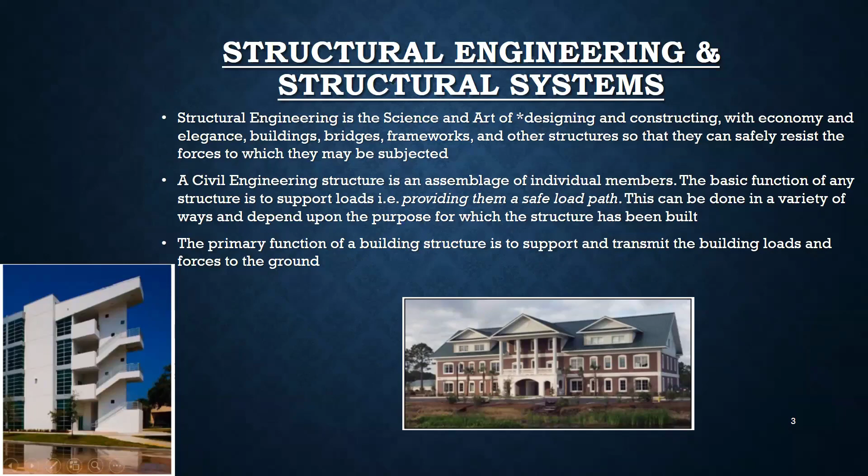The load patterns, as you know, are such that gravitational loads are transferred from the roofs to the beams, from the beams to the columns, and from columns to the foundation.

But in reality, we could not have a simple structure. We could have unsymmetrical buildings also, like this one, or this one. So what we have to do is accurately design for these shapes.

Normally there is a debate. Some engineers say that softwares are not that reliable and you have to do it the manual way, but it's not that way. In manual designing, you only design for gravity load. We take the help of software because it optimizes your work, and if you don't use it, if you are designing a 50 plus storey building, you will take months to design it. By the aid of software, it only takes a few days.

But purely relying on the software is not enough. You need basic concepts and basic checks to know whether your design is safe or not, because software is just like a machine. Whatever input you give, it will give you the output, but if you haven't given the proper input, the output will not be proper. So you have to have checks to verify the values are not drastic. For example, if you design a beam of 40 inch, that can be designed by software, but is it practically acceptable? That needs to be checked.

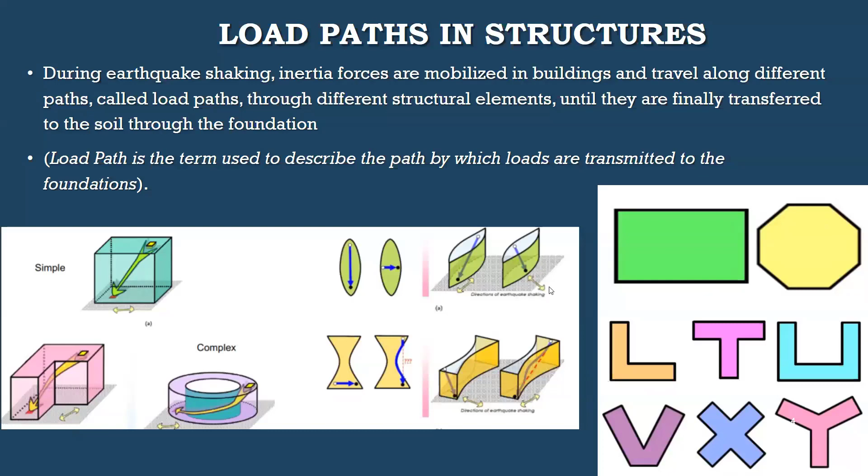In addition to that, you could be having different types of irregular shapes. For example, you could have a complex shape like an L shape, T shape, U shape, V shape, X shape, Y shape. So what is the main difference in designing these? The torsion and twisting effect comes into play, so the design gets a little more conservative and you have to do proper checks.

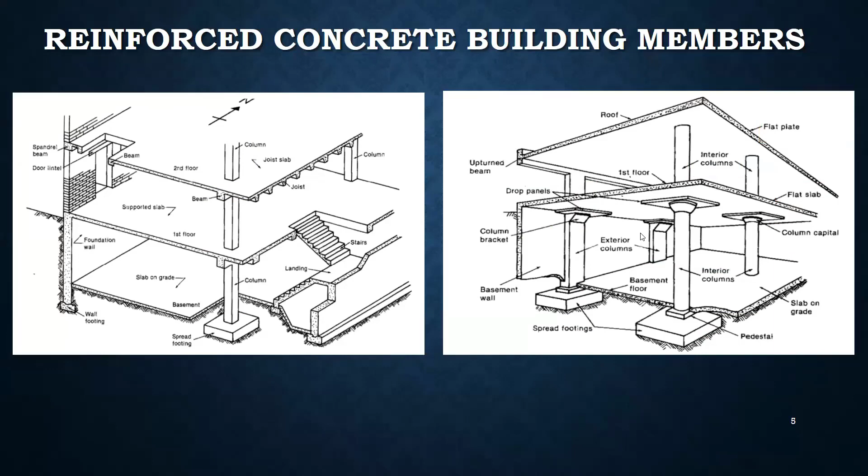There is always a conflict between an architect and a structural engineer. An architect mostly looks for aesthetics and doesn't have much knowledge about structural stability, whereas an engineer is always concerned about structural stability and performance. So they both have to work as a team in order to make it structurally sustainable as well as aesthetically good. But safety is the main concern - you should not compromise the strength with respect to beautification. So that debate needs to be resolved.

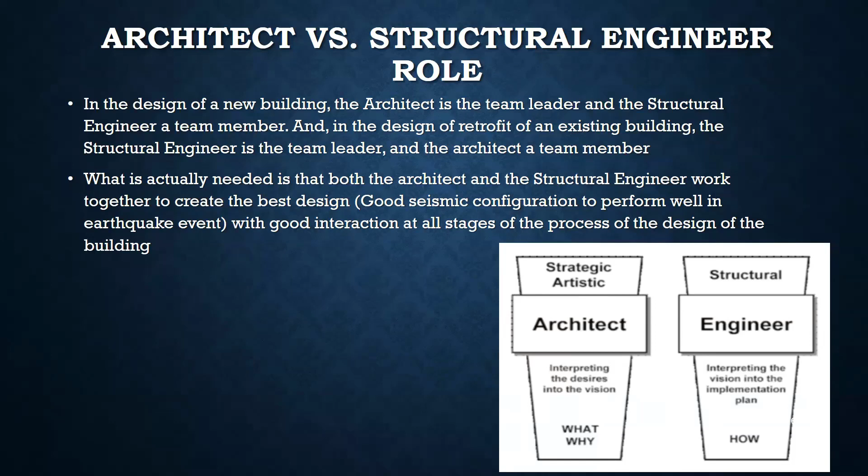For a bridge structure, an engineer is also always the architect, because in bridges we do not have architects. So bridge aesthetics is always dependent on an engineer. The structural systems we could have are gravity load systems and the lateral load resisting systems.

In gravity systems, we can have this slab supported on load bearing walls, slab supported on columns, slab supported on beams, and the beams supported on another beams. What happens is that if the spans are long enough - these are spans - for example, these are two beams resting, so we have to provide an internal beam in order to control the deflection and also the depth of the beam. So this beam is thus resting on another beam, not on column. So in that case, we give...

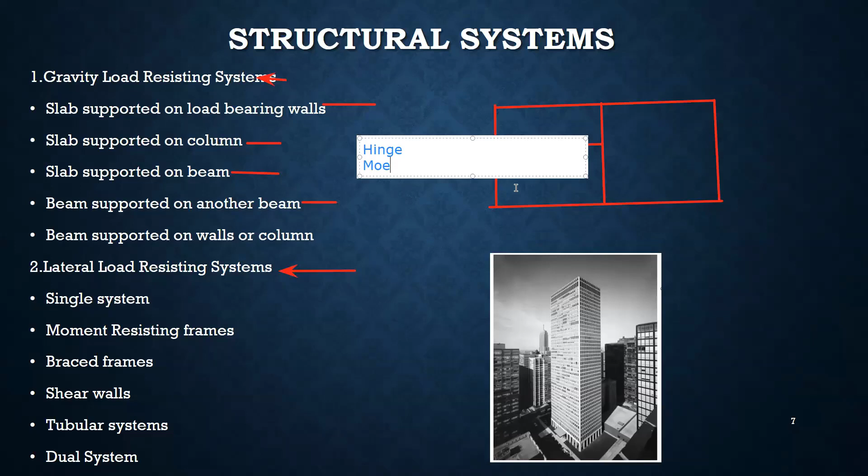...what we call as the hinge, or we can say the moment releases. Since the beams are resting as simply supported, the joints are not rigid there, and that is properly modeled in software like ETABS and SAFE. When we have secondary beams, the options are there, and then we manually give the input as secondary beams and primary beams.

And lateral load resistance system, which we can have: single system, the moment resisting frames, the braced frames, the shear walls, and tubular systems, and a dual system. As we move down, the height increases. So as we go higher, then we go with advanced shapes, and performance-based designs come into play.

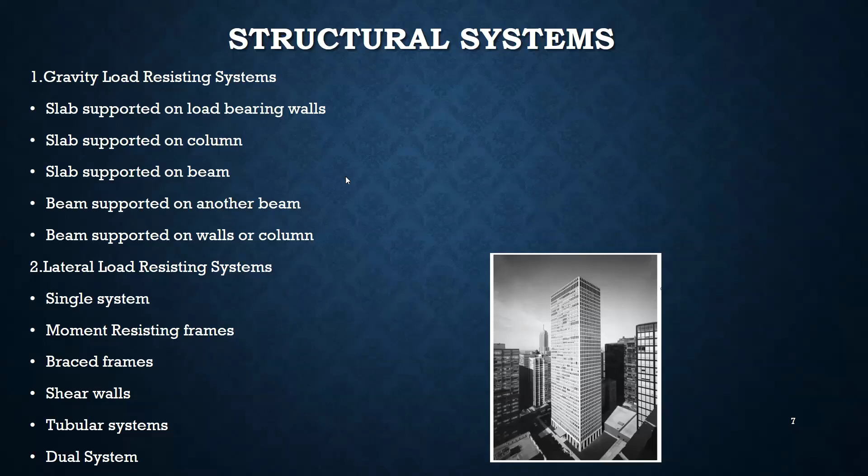So what is a wall bearing system? These are typical G+2 type of buildings maximum, where the slab is supported directly on the columns, and the columns may be of bricks. There is no proper design - these are all basically thumb rules and old standards. But keep in mind that these are not seismically strong enough, and for high seismic zones they are not recommended. So we have to avoid this, even if you are providing a G+1 building.

So in high seismic zones, you have to avoid this, because they have no lateral resistance and are only supporting gravity load. So in that case, if lateral load acts on it, the building is likely to collapse, and you can have loss of life.

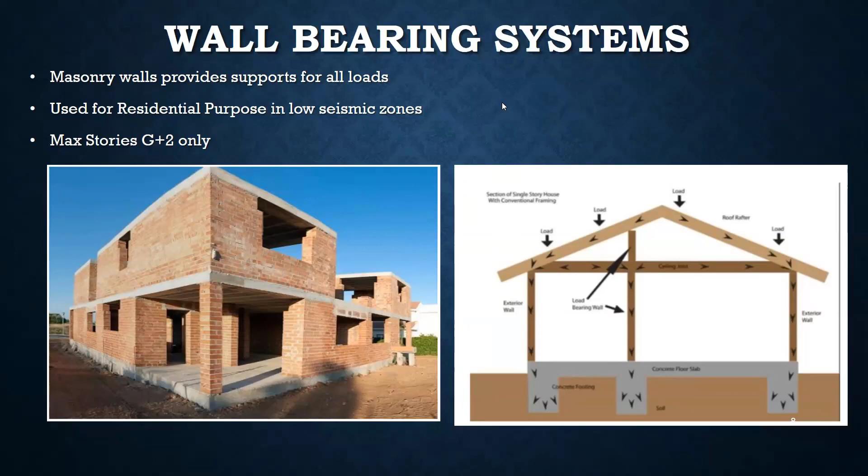A frame may be composed of a strong column and weak beam system, or a weak column and a strong beam system. But naturally we go for strong columns, because the columns are the main supporting elements, and you have to give the column more strength than the beams. If beams are stronger, then all the torsion will be taken by the beams, and the column will not take torsion. In case of lateral load, it is vulnerable to not behave properly.

And they are mostly used for medium rise buildings. For example, you can go up to maximum G+10.

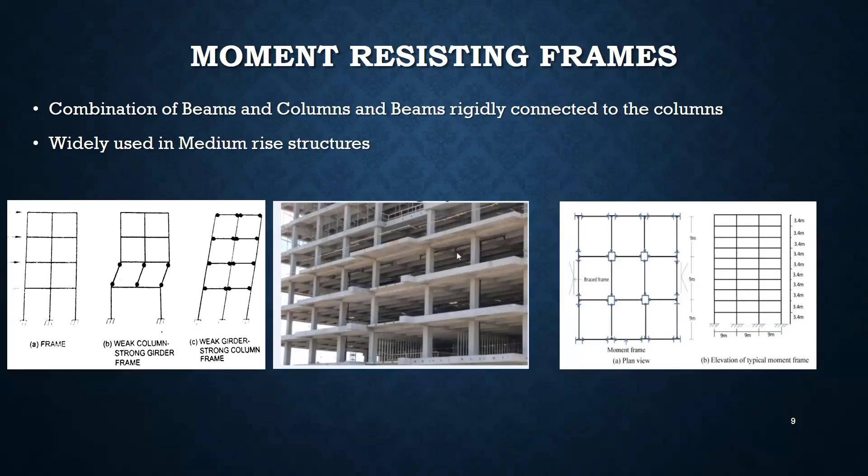Okay, shear wall. When the height increases, or we have non-symmetrical shape, like we have this type of arrangement, or you can say this type and this type of arrangement, in that case the twisting effect comes into play.

We perform the modal analysis in this type of structures, and in modal analysis, from the results we get different modes, and we have to control the translation as well as rotation. So if that is not controlled - as per the code there are some values - some codes say 90%, and these are basically ux, uy, uz, and rx, ry, rz.

So the software performs this analysis and gives the result. You have to check whether this is satisfying the code or not. If it is not satisfying, then you go for the walls. Basically the purpose of the wall is to give stiffness to your building. As you go higher, the stiffness reduces, so in that case you have to stiffen the building, and this is the best option we have.

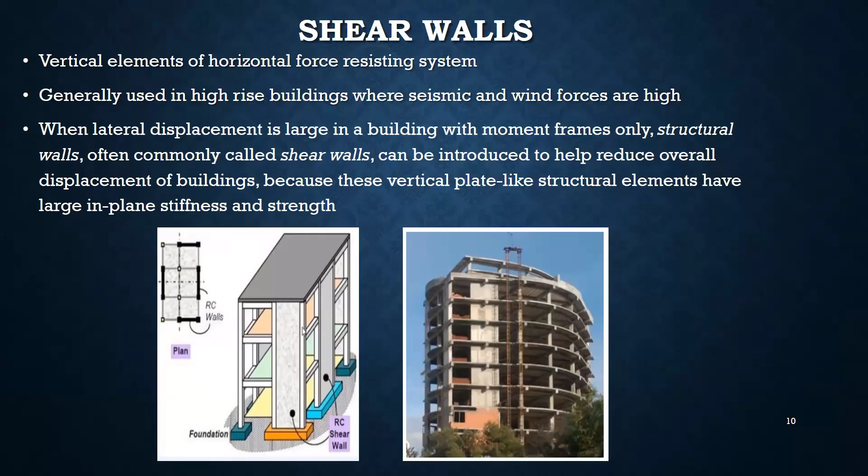And you can use it in moment resisting frames also. As we go higher, then the demand of RCC walls increases, right?

Okay, brace frames. As we go higher from a particular story height, then moment resisting frames are not safe enough to be used in the design, so in that case we use the brace frames. The frames could be diagonal frames, X frames, V frame, chevron bracing, K bracing, and global bracing.

What is interesting in this is that it also gives you good aesthetic view, if you can see from the outside in this image. So not only is it performing structurally safe, but also it is looking very good aesthetically. So it is serving the purpose for both the designer and architect.

Normally you can see nowadays that some buildings have very awkward designs - you can see the cross bracings and the non-vertical members. This is all possible because of performance-based design. And when you have the design adequate, you can provide any shape then, right?

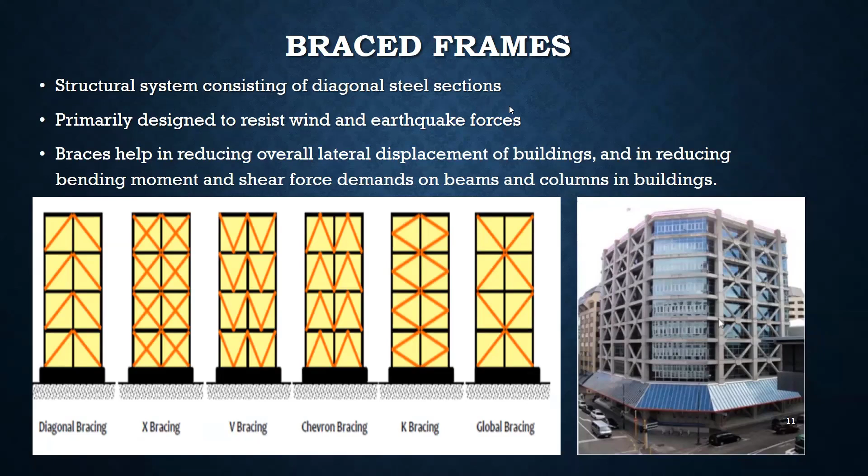So the types of buildings based on stories: up to G+10 you can call mid-rise buildings, up to G+20 they can be called high-rise buildings, and tall buildings G+100 and so on, there is no limit. Nowadays, you must have heard that in Jeddah they are building a building which will have a height of 1 kilometer. So even that is possible.

There are some interesting facts about mid-rise buildings, short buildings, and tall buildings. I will explain this in a bit of detail. For example, these are 3 buildings: this is a short building, these are medium buildings, and this is a high-rise building.

If you give an earthquake input at low frequency, the high-rise building will oscillate at low frequency, the medium-rise building will oscillate at medium frequency, and the short building will oscillate at high frequency. What we have seen recently at the very strong earthquake in Turkey is that most of the buildings were medium-rise, mid-rise buildings, and they collapsed because the P-delta effect was not considered in the design.

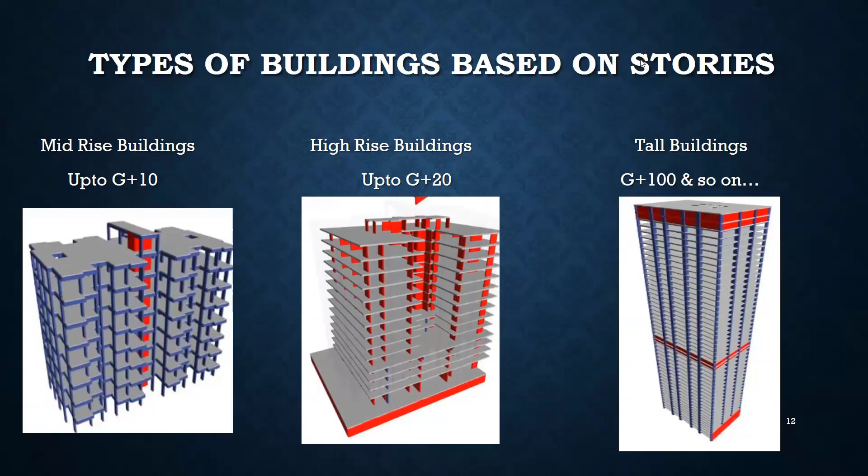So, high rise structures configuration.

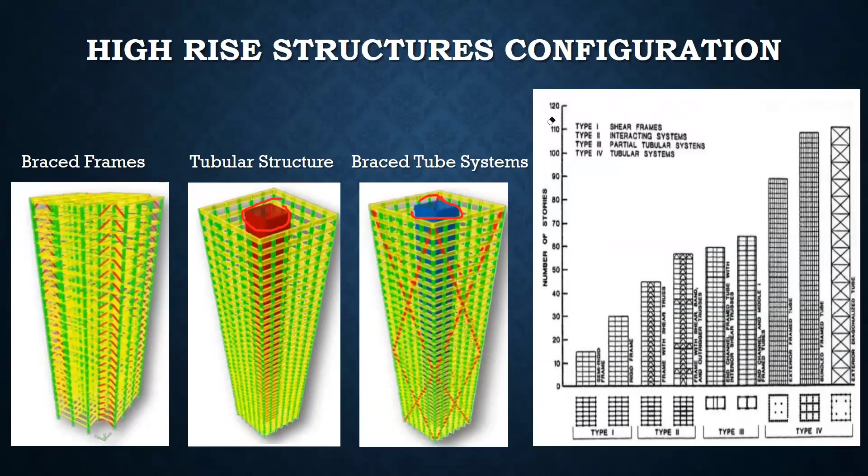We can see the center core arrangement, and these are all shear wall type arrangements, and the purpose is to give stiffness and uniformity. It is provided in the center to give more stability in the building. So as we go high, we can have any type of arrangement, but tubular structures and diagrid arrangements are normally used in high-rise buildings.

So regarding the deformation capability of buildings: if you have a moment frame only, as we go high, the sway effect keeps increasing. So we provide the structural wall, but with structural wall also, as we go high, the drifts are exceeding limits. So when we go with the global brace, the drifts are reducing. That is the recommended solution for high-rise buildings. The more you go high, you have to use bracings also.

In buildings, as we increase the number of stories, the second order P-delta effects come into play. For a 5-story building, there is no appreciable drift. In 10 stories, the drift is coming into play. At 15 stories, the drift is increasing, at 20 it is increasing more, and at 25 it reaches an unacceptable limit, which causes damage to the building and non-performance in case of an earthquake.

So based on the number of stories, we can classify: up to 60 stories you can go with the concrete frame tube, up to 80 stories steel frame tube, and tube in tube. For example, this is the internal core arrangement, and for higher than 100 stories, concrete brace tube. As we go higher, the number of floors increases, so we go with space truss and super frame arrangements.

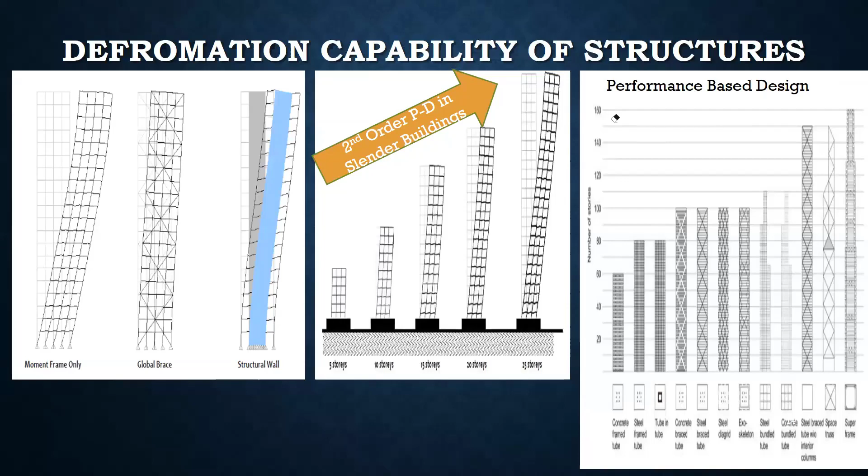So what are the different methods of structural design? You can have the working stress method, the ultimate strength method, and performance method. Working stress method is now non-popular because it is not as per the latest design codes.

The ultimate strength method, the LRFD method, is used for a particular height. Moment resisting frames are using it. The performance-based design is the most used for high-rise buildings. The higher stories are all designed based on the performance base.

So what we have to do is the serviceability design. You have to have the allowable material and control on the deformation limits for design load. In strength design, the material failure criteria comes into play. The section capacity is designed for the factor loads.

In performance design, you have to have a ductile structure and not a brittle structure, and the deformation capability is increased, and the loads, extraordinary loads, are considered. So it is basically the performance, and based on the performance, you design your structure.

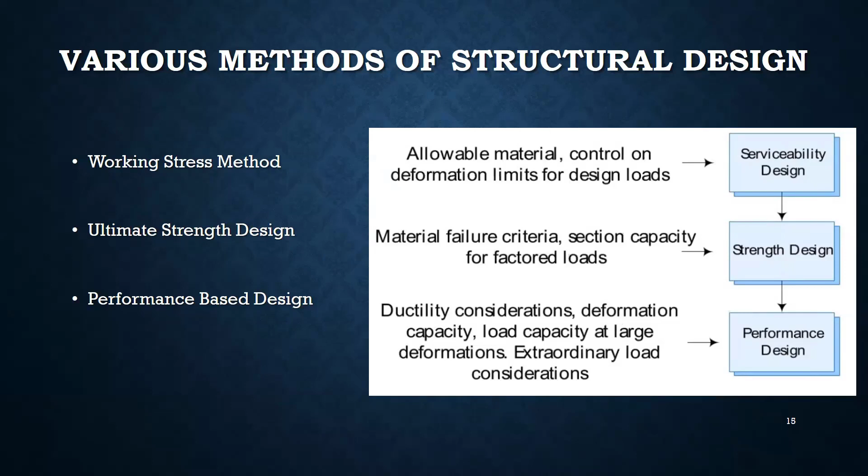For example, if you are designing a moment resisting frame, you know what type of building you have. But in performance-based design, you cannot restrict yourself to any type of building, because based on the performance, you will then decide which type of building to be used.

So what happens in the building, what is the load distribution arrangement, the gravity loads, they are transferred to the vertical members, and some terms that are used in software.

Software classify these as diaphragms, the slabs, then the moment resistive frames, and the shear walls are also there. So what shear wall does, it transfers the lateral load to the vertical members.

So you can see that the lateral load, as we go from top to bottom, the intensity reduces, but the drifts are excessive at the top floor and less at the ground floor.

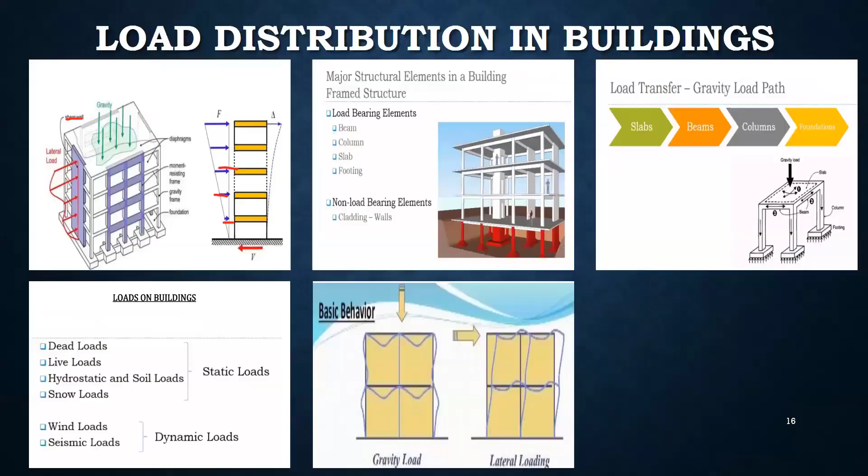Now comes a very important thing: this soft story effect. This is the major point of discussion nowadays after the earthquake of Turkey.

What happens is that in plazas you have seen that the basement is reserved for parking. So due to the parking, the spaces are open, and open spaces causes this soft story.

By code, what is meant by soft story? Soft story is one in which the lateral stiffness is less than 70% of that in the story above, or less than 80% of the average stiffness of three above stories.

So the base structure, the base stories always have low stiffness because of these open spaces. So what happens is that under earthquake, this soft story effect comes into play.

The plastic hinges tend to form, and due to this plastic hinge, the column tends to leave its position, and it causes the collapse of the building.

This is what has happened recently. If you have seen the visuals of the earthquake, this is what has happened.

What ultimately happens is that the building falls down. First the vertical members fail, and then the building falls down.

So how can you minimize this soft story effect? By providing the shear walls, the bracing, or the steel framing arrangement.

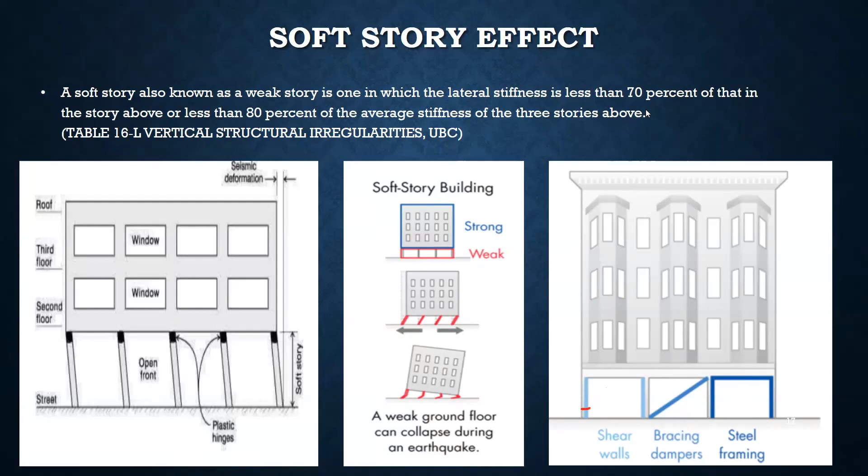So weak story effect, as per the ACI, you have to check the vertical irregularity also. It is mentioned that a structure is classified as weak story if the shear strength of the story is less than 80% of the shear strength of the story above it.

And also extreme weak story exists if the shear strength of a story is less than 65% of the shear strength of the story above. These are taken from the code. So these checks are also performed before designing a structure, and all these are not recommended because they cause damage to the structure.

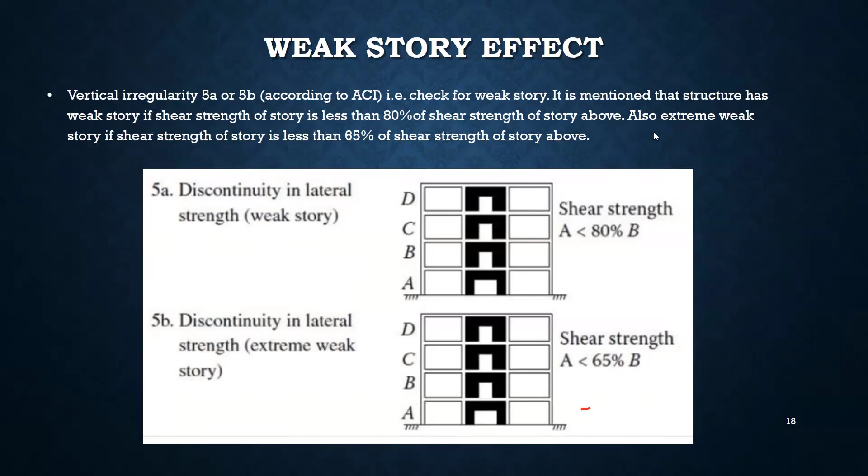In foundation design, one is the superstructure, and the superstructure is supported on the substructure. Foundation is that part which is in direct contact with the ground.

You have to place your foundation in such a way that it is safe and has no moisture or passage of water. It should always be dry, because if you have a saturated clay type of soil, due to saturation, the liquefaction effect comes into play. Due to liquefaction, when the lateral load comes into play, it causes loss of shear strength of soil. The shear strength gets to zero, and due to zero shear strength, it acts like flowing water and collapses.

So the importance of a proper foundation is very important. As a structural engineer, for mega projects, the soil investigation report is a must. Normally it is the geotechnical engineer who recommends the type of foundation. It is his duty to give recommendations on what type of foundation to design, for small projects or projects in safe zones you can do it yourself, but you also need the soil investigation report. Without this, if you go on designing, it might not be acceptable at the latest stage of building performance.

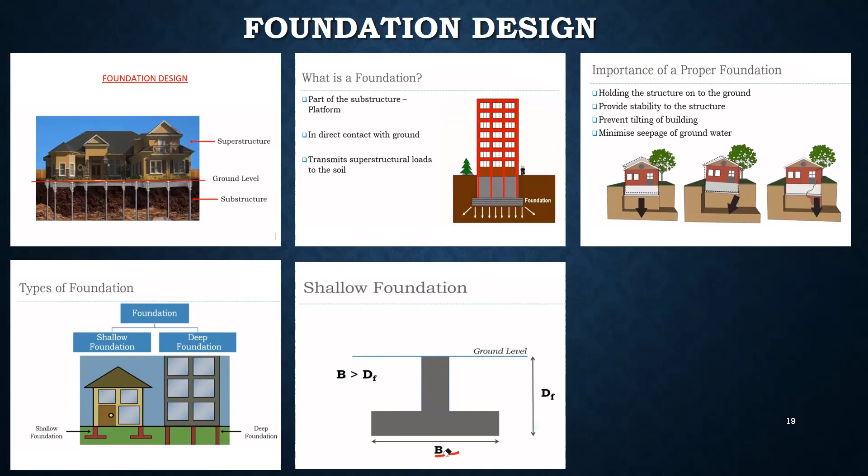We will now discuss the types of shallow foundations. We can have isolated footings, strip footings, raft footing, and if you have a sloped ground, the step footing also.

So what is a deep foundation, in which the depth is greater than the width? That is called a deep foundation. There are certain requirements for why we go for deep foundation.

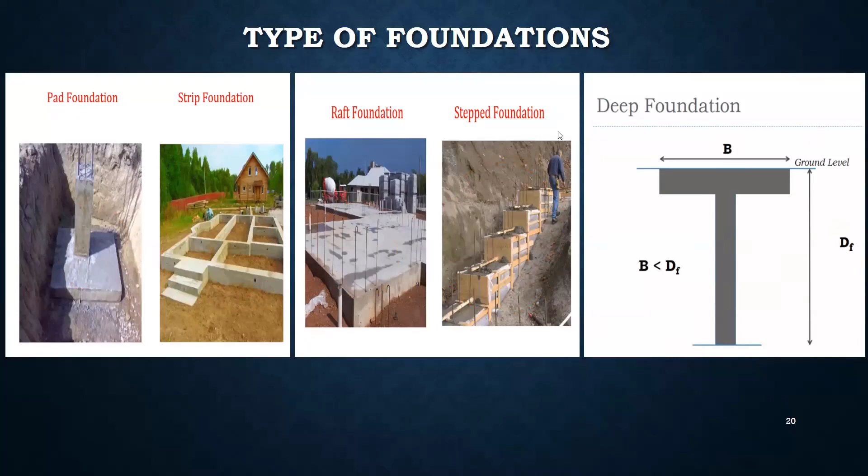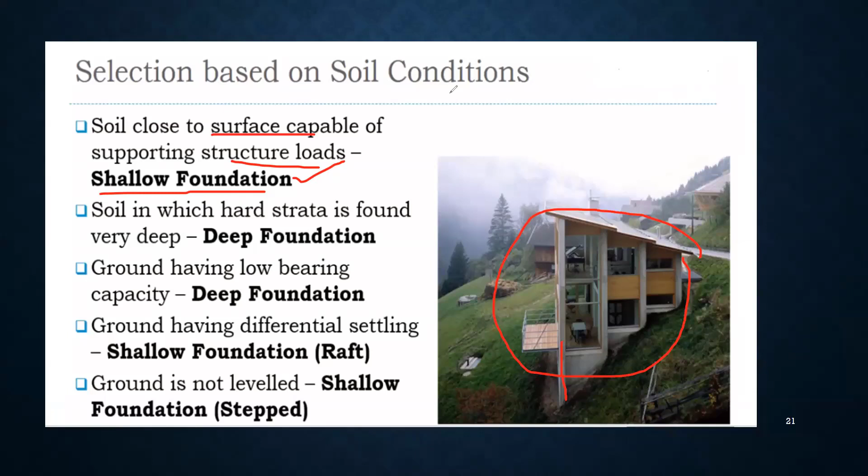Foundation selection is based on soil conditions. If the soil close to the surface is capable of supporting the loads, you can go with shallow foundation. If the hard strata is found very deep, as in this kind of sloped ground where the hard strata lies very below, you have to go with deep foundation. For ground having differential settlement, you can go with raft foundation. And if the ground is not level, you can go with step foundation.

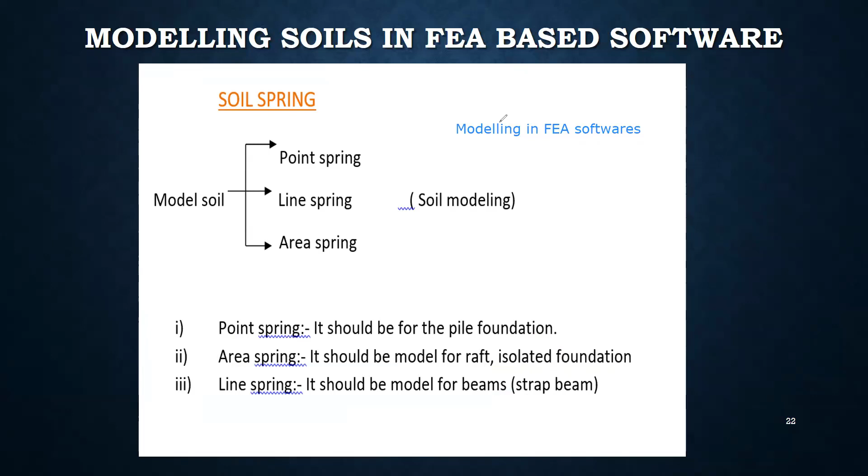Now coming to the modeling of soil in software, FEA softwares like ETABS and SAFE model the soil. Point spring is used when we have a pile foundation, then the soil is modeled as a point spring. When you have isolated footing or raft footing, it is modeled as area spring. When we have strap beams, it is modeled as line spring. All these are modeled in the software using these names, just so you understand how we model soil in software.

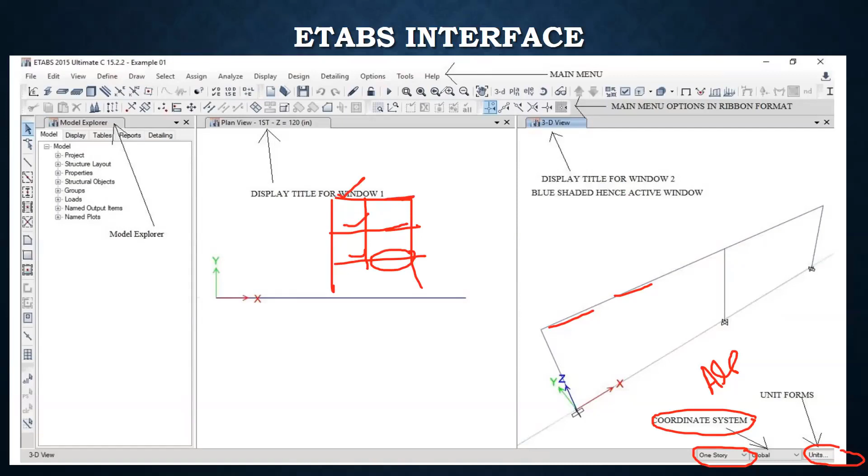If we select any member with one story chosen, only that story will be selected. But if all stories is selected, then if we click on one member, for example if this is a frame and you click on this beam, all the beams will be selected. So this is always checked when assigning any member or property, to see whether we are selecting one member or all.

If you open ETABS, you will see by default this type of three windows. In this view you can see the plan view, and this you can see the 3D view.

You can always change the screens by yourself. You can go with the single screen also from this button. If you click here and click on 3D, the 3D view will come into play. If you click on plan you will see the plan, and if you click on elevation, the elevation views will come. These are the toolbars and the menu bar.

You can see these are the shortcut keys, and this is the vertical toolbar. You can see the different shortcuts here.

This is the button for slabs. This is for frame members, it can be beam or column, and these are for walls. So these buttons we use the most. These are for the different options we use.

For example, the viewing options. And when we analyze the model in ETABS, this button locks the model, and this is the button used for the run analysis.

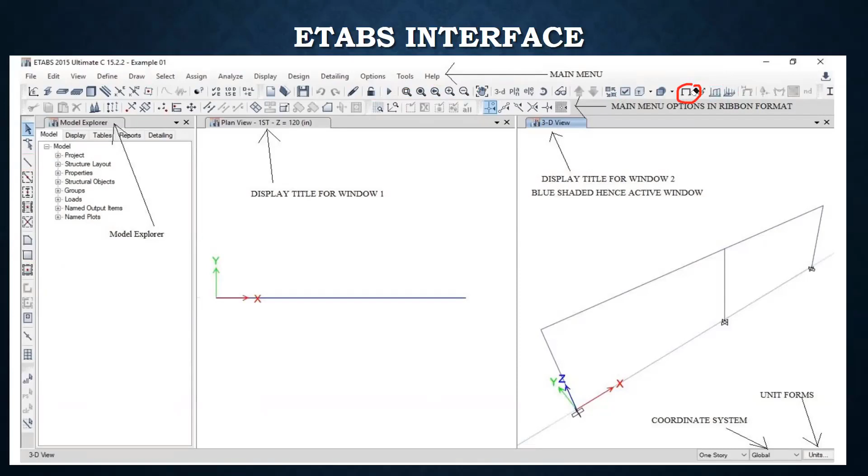Next, we will discuss the different workflow in ETABS, so how we design the building in ETABS. First we define the geometry of the building.

It can be in the shape of grids. Normally, the FEA is based on the finite element method. It performs discrete analysis. It divides the member into small components, and each member has different nodes, connected by nodes from one member to another.

So by default you can go with the grid option, or you can also model the structure by importing a file from AutoCAD or even Revit. In that we use the import DXF file option - a file already prepared in AutoCAD or Revit is then imported in ETABS, and modeling is done.

If you are not using this option, you can manually model it also in ETABS. So the first step is defining the grids and the number of stories and their properties.

The second step is we define the materials, the steel, the concrete. We give different strengths to it, and that strength we then use in the design. So if our design is not satisfying, we can go back and change the values, just like we do manually - when our design is not satisfying, we change the values and properties.

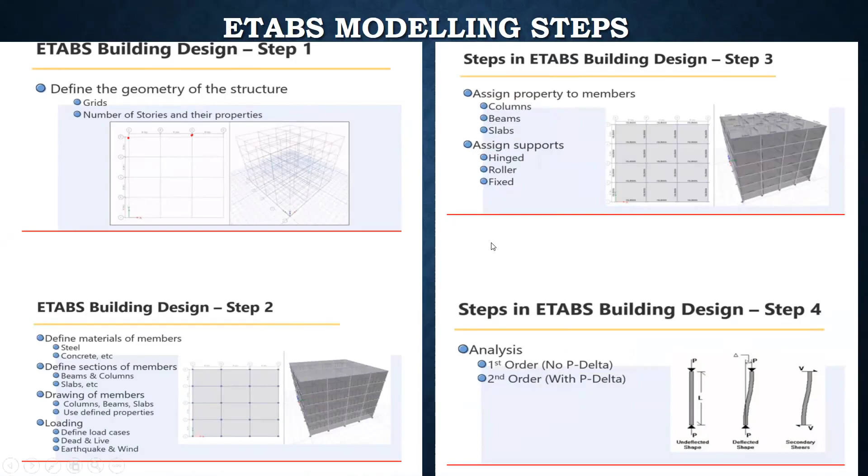After that, we perform the static analysis or the dynamic analysis. In the dynamic analysis, we go for the time history analysis also.

If the member is passing, by default it gives us a purple color. Not passing, it will give us red color. In that case, we have to select it and check why it is not passing, and we then go with the reanalysis and redesign of it, right?

So what happens then is that we design for steel and concrete members, the composite section can also be designed, and the connections can also be designed. And in the end, we get the project report and the detailed report.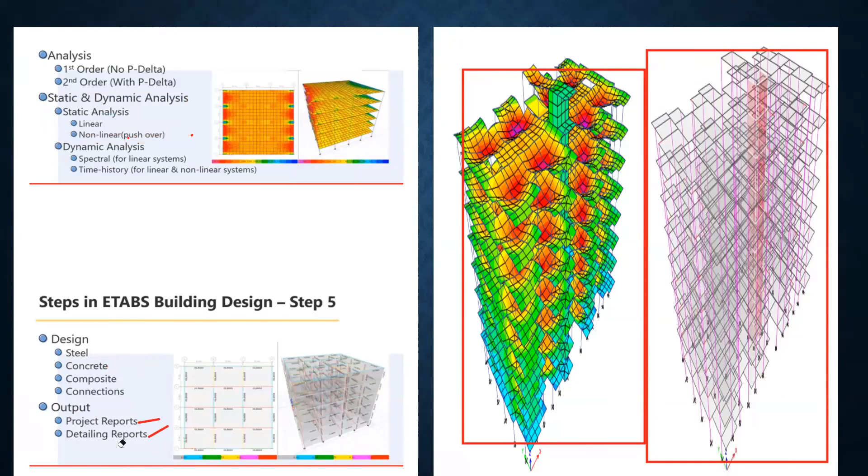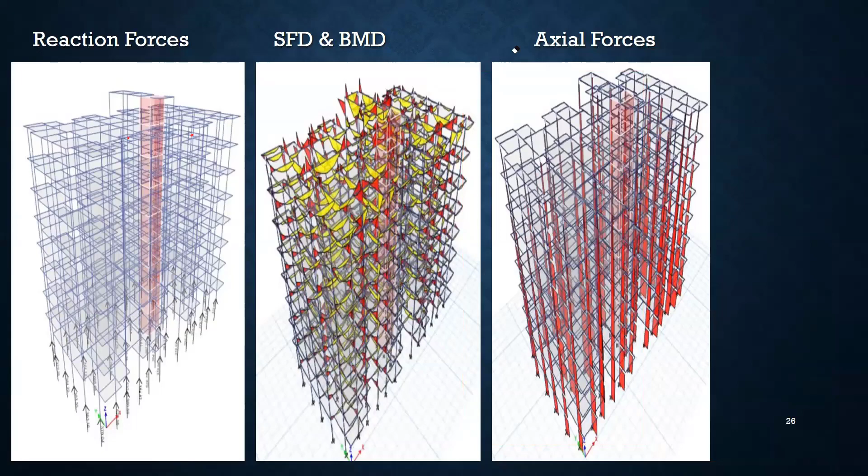What ETABS gives us after analysis, we get these reaction forces, the shear force and bending moment diagrams, and the axial force diagram. All these are performed by the software, and you can visually check each member and see for yourself whether they are satisfying your requirement or not.

Some notations that are important in ETABS analysis and design: P is the axial force. There are V2 and V3 shear force notations used in ETABS. V2 is the primary shear force, so we will take this value and not V3, right?

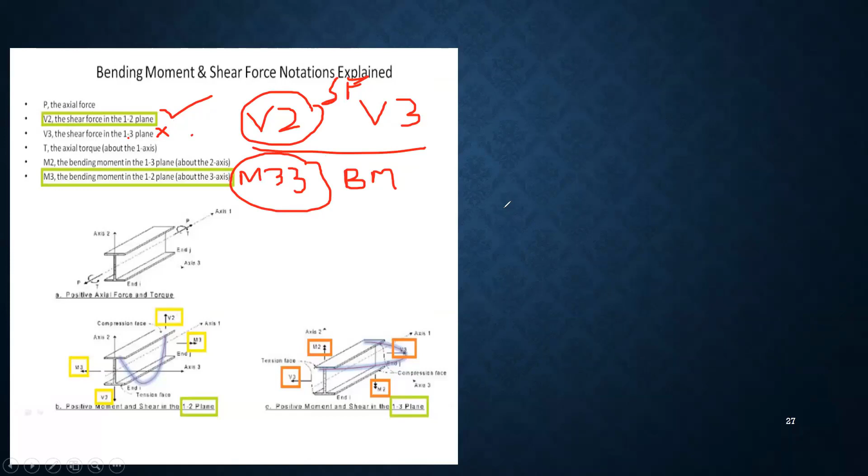T is the axial torque about one axis, and the principal bending moment is M33 and not M22. So always take the values of M33 and V2. These are the shear values, shear force, and these are the bending moments. So if you have to manually check, you have to take these two values and check your design accordingly. This is V2 and this is M3, and this is their behavior.

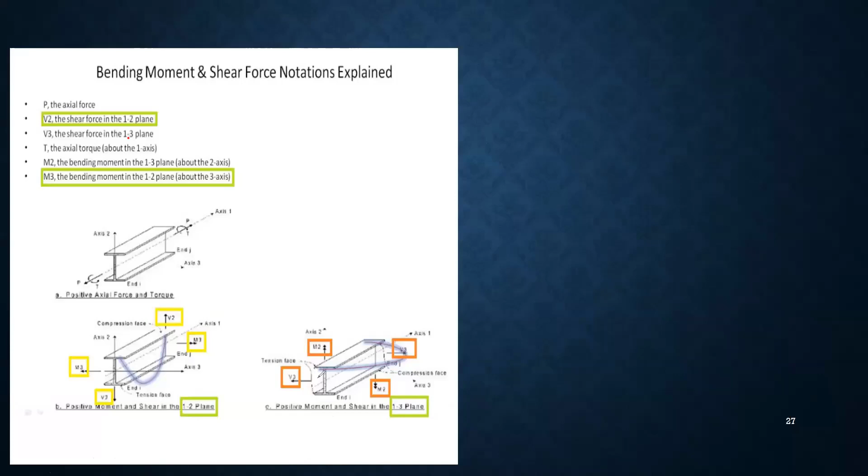These are the checks we perform after analysis. We don't straight away go with the design. If you go with the design, the software will design for you, but this will not be sufficient.

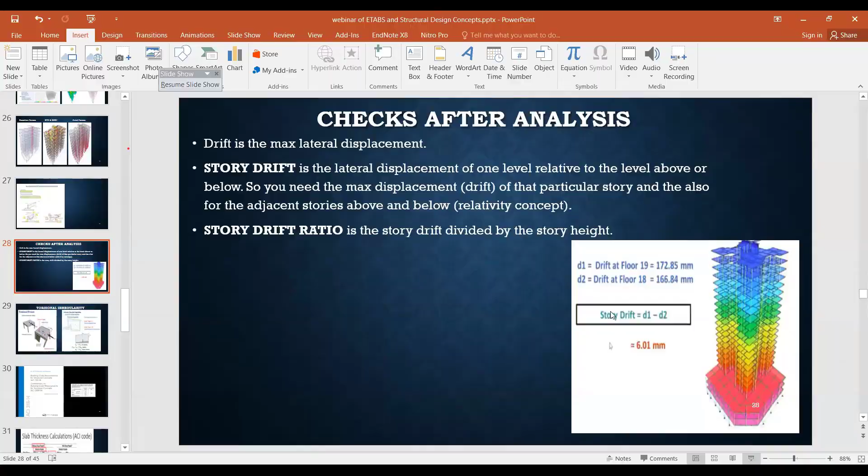So drift is the maximum lateral displacement, and story drift is the lateral displacement of one level relative to another level above or below. So we always need the maximum displacement of that particular story and also the adjacent stories above and below. Story drift ratio is the story drift divided by the story height.

D1 is the drift at floor 19 and D2 is the drift at floor 18. So what will be the story drift? It will be D1 minus D2. So the story drift will be 6.01 millimeters. Keep in mind, don't go with this value as the drift itself - it is always a difference between the two stories, right?

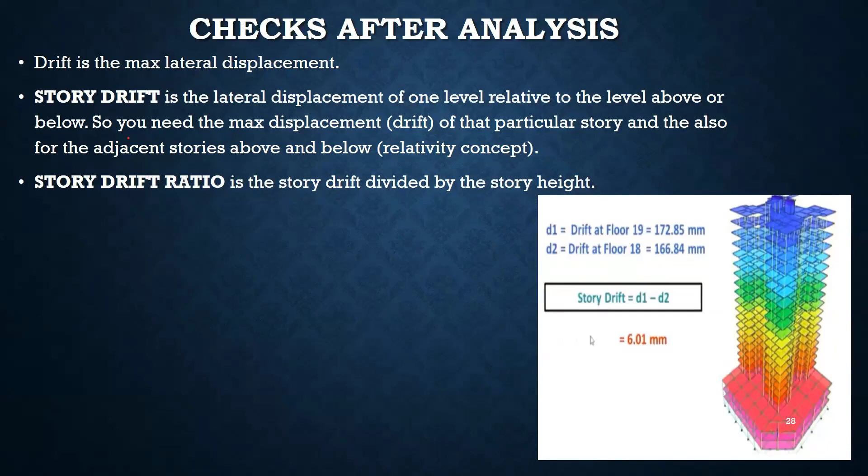What is torsion irregularity? In an unsymmetrical building, the center of mass and center of rigidity don't coincide. So when they don't coincide, then twisting effects come into play, right?

This will help in controlling this twisting effect. What happens is that the gap then reduces. If you increase the stiffness in one direction, the gap reduces. Another arrangement, you can go with the shear wall, and this is a trial and error method. We do different trials, and ultimately we reach a stage when the iteration is successful and we control these torsion irregularities.

By the code, what is meant by torsion irregularity? The D maximum, the maximum drift divided by the average drift, it should not be greater than 1.2. The software automatically calculates these values for you. Only you need to check the ratios.

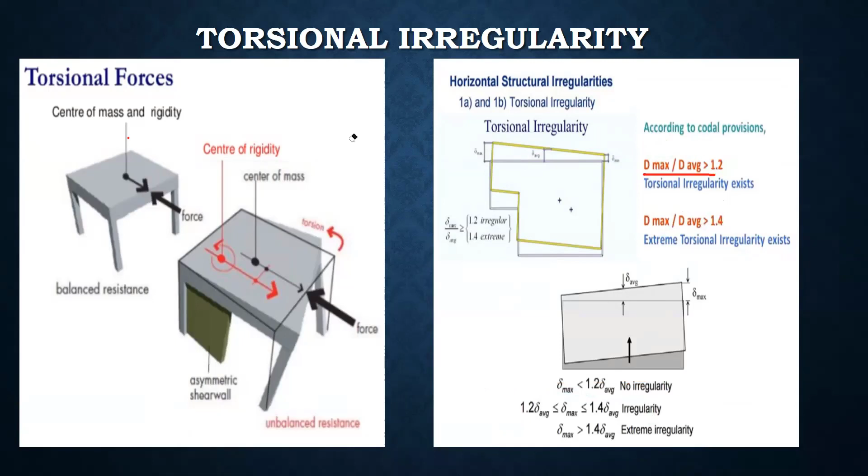And what is extreme torsion irregularity? When this ratio is greater than 1.4, we call it extreme torsion irregularity. So in no case should we allow the irregularity to take place. These three important checks, along with the drift, you have to check after analysis, and then if it is okay, go with the design.

Modifiers we manually enter during modeling, right? So based on the type of member you have, from this code you can take and place the values in the software.

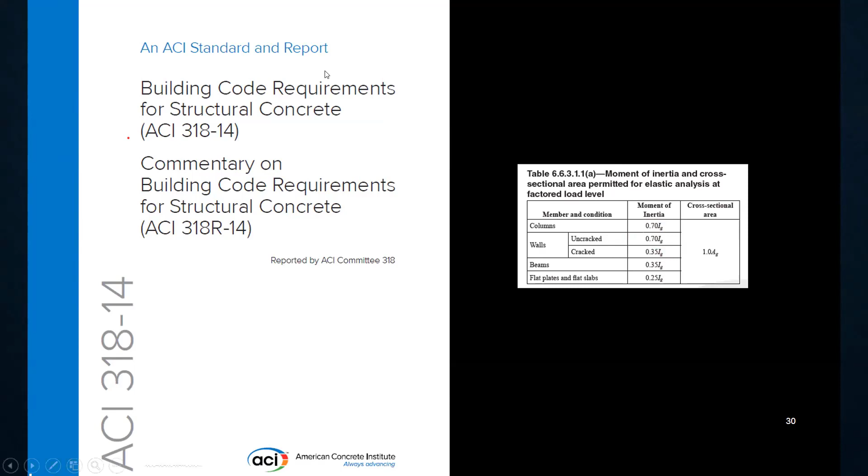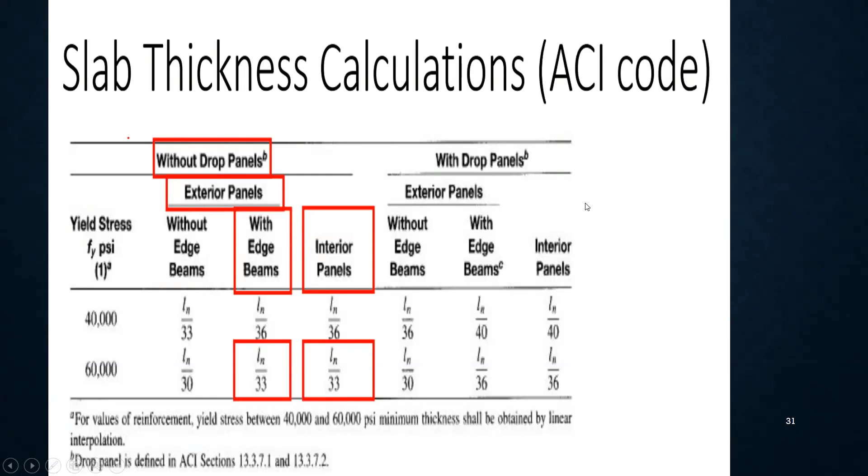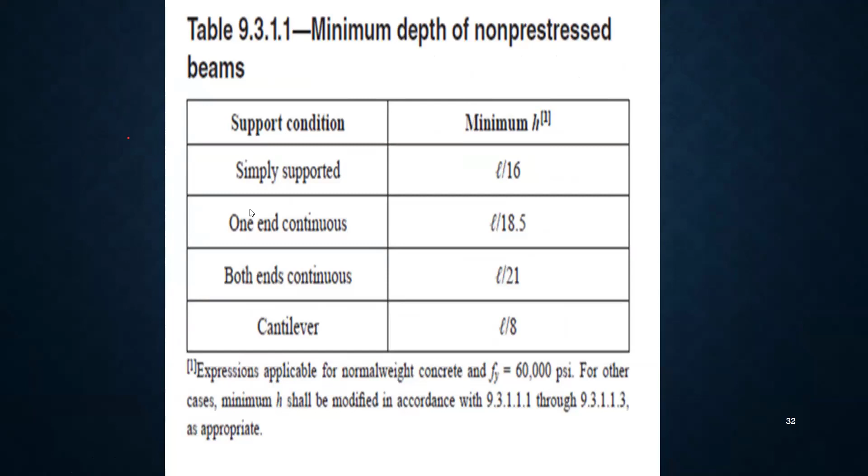So how is the slab calculated? This also comes from the ACI code. If you have different strengths and different arrangements, with or without edge beam, interior panels, with drop panels, you can use this to manually calculate and place the values in the software and check whether it is satisfying or not. Similarly, for the depth of beams, this is also from the ACI code, for different types of arrangements: simply supported, continuous, and cantilever.

After analysis, we check the long-term deflection. The members, we manually check, and we see the values. If it is less than this, it is okay. If it is more than this, then it is not okay, and we need to modify our modeling and reanalyze.

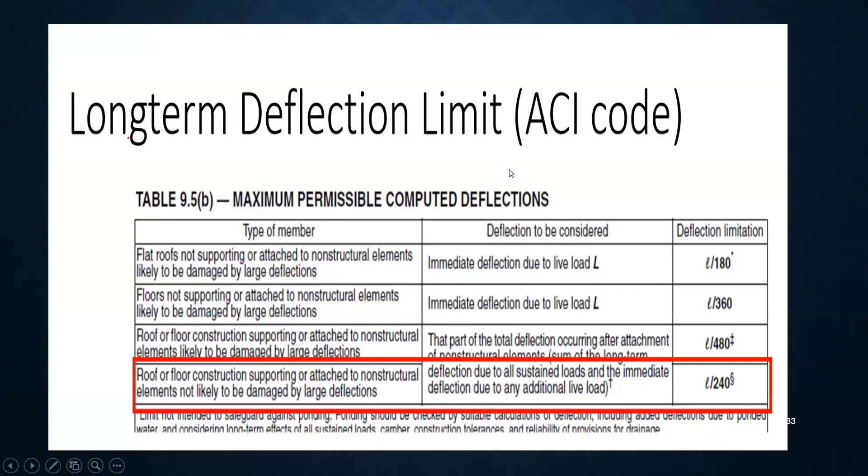So what is the one story, as I already explained. One story, if you see here in the bottom of ETABS, is one in which you select and only one member is selected. All stories is one in which all stories are selected. And similar story is one if you have two floors similar.

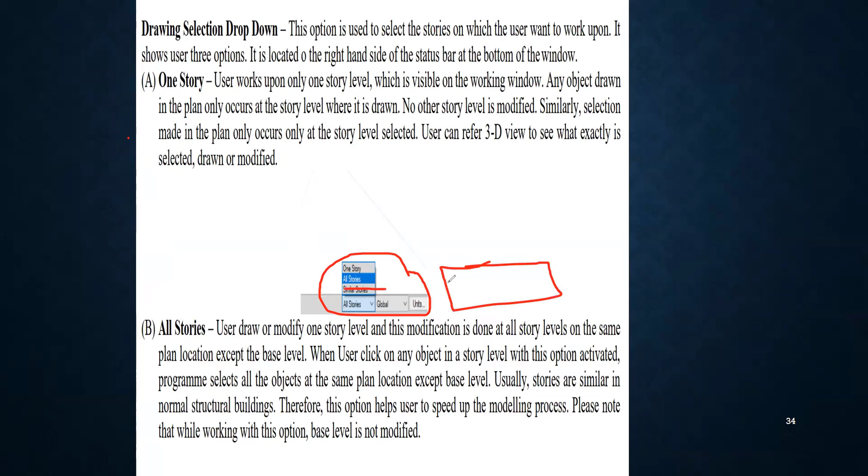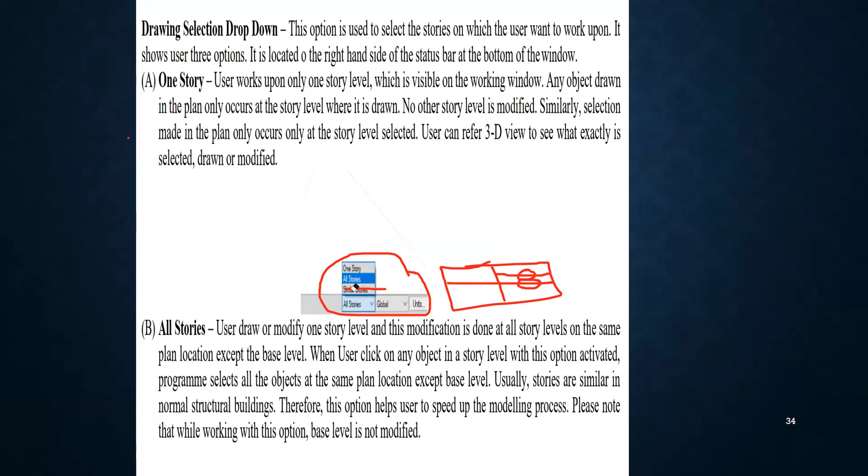So we assign the property of similar. If you click on this one member and the other is similar to it, it is also selected. So in that case, similar stories is also used. So all these help us save time.

Units are always important to check before modeling, and there are two unit types: the US default or the metric. So you have to use one of them.

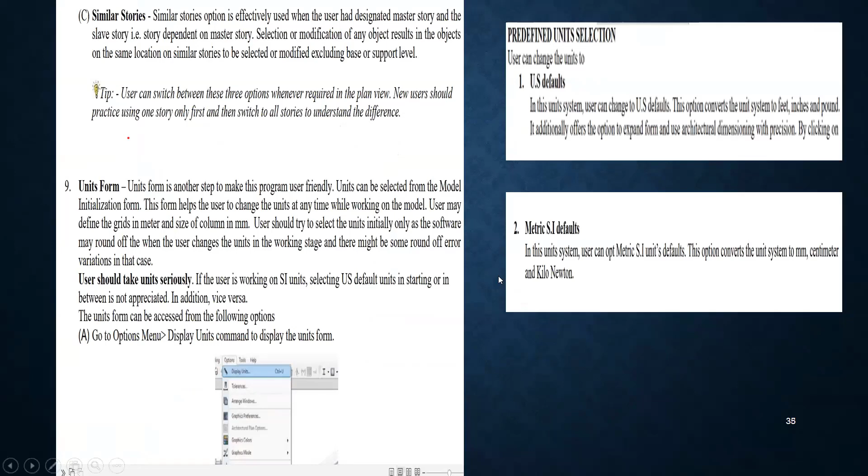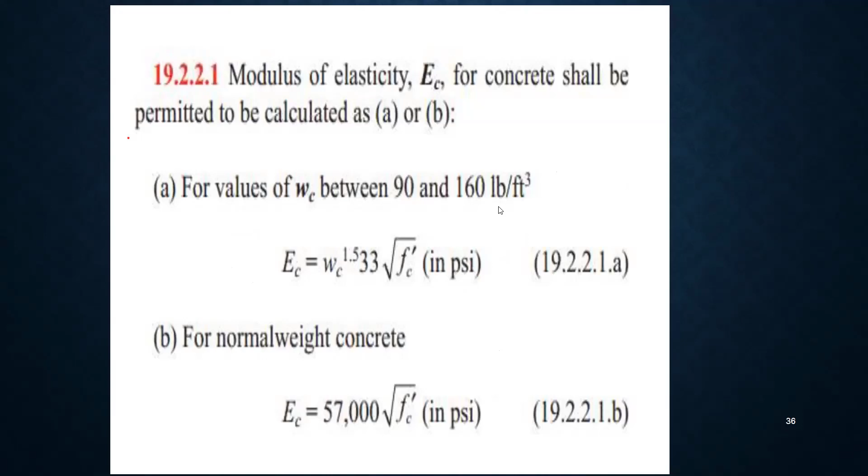The modulus of elasticity, this value is also manually calculated. If you have a 3000 psi concrete strength, you use this formula and put this value manually in the software. This is for this kind of unit weight, and for normal weight, this kind of formula is used. So these are something which we manually calculate and then put in the software.

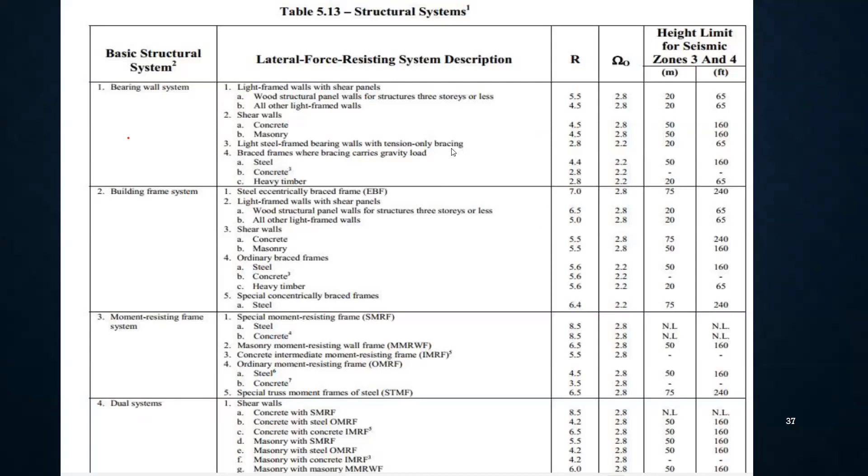And the importance factor, this is also used in the software, and these are the different descriptions of what type of building you are designing, and from this you can take the values.

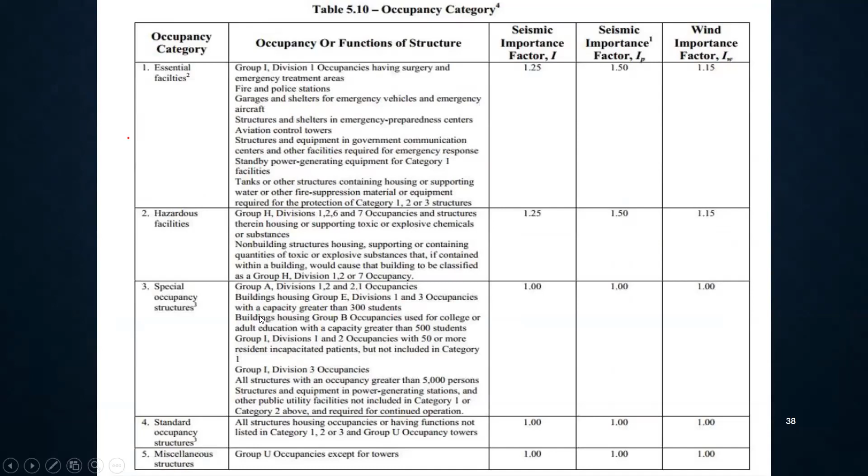And these are the floor loads. These are also manually entered in the software. For example, if you are designing a hospital, the load in PSF is given. For library it is also given, for residential also given, and for assembly also given. So take help of these and put it in the software.

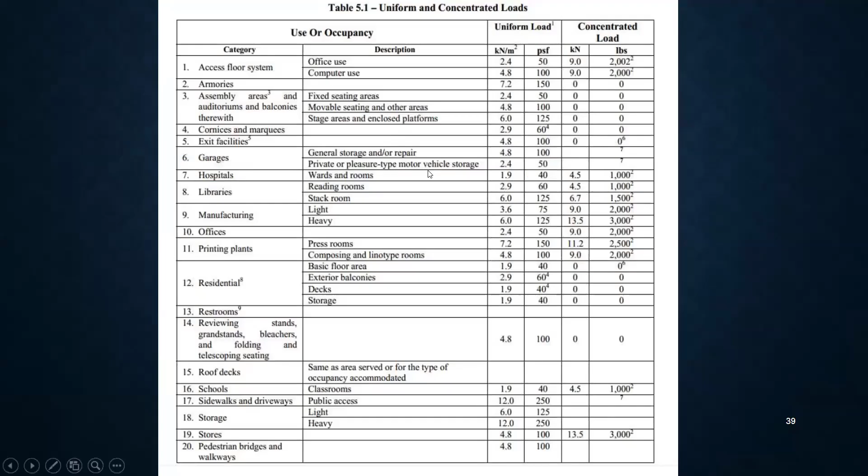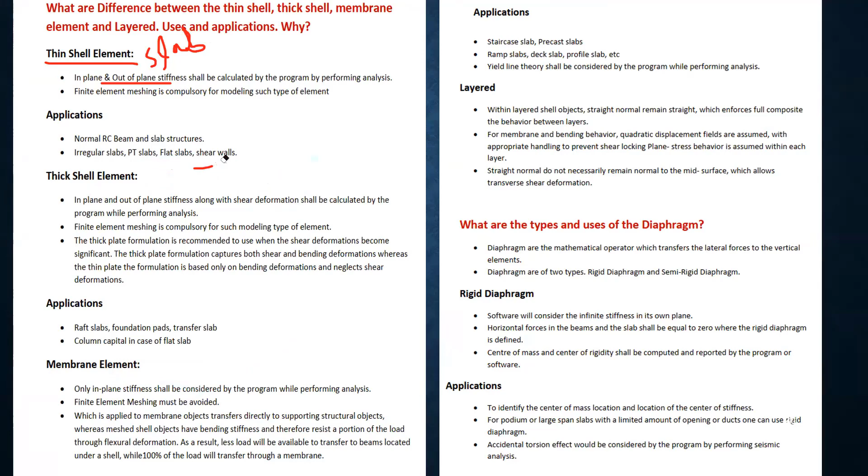So slabs are normally modeled as a thin shell, and the footings as a thick shell, right? And staircase as membrane, right?

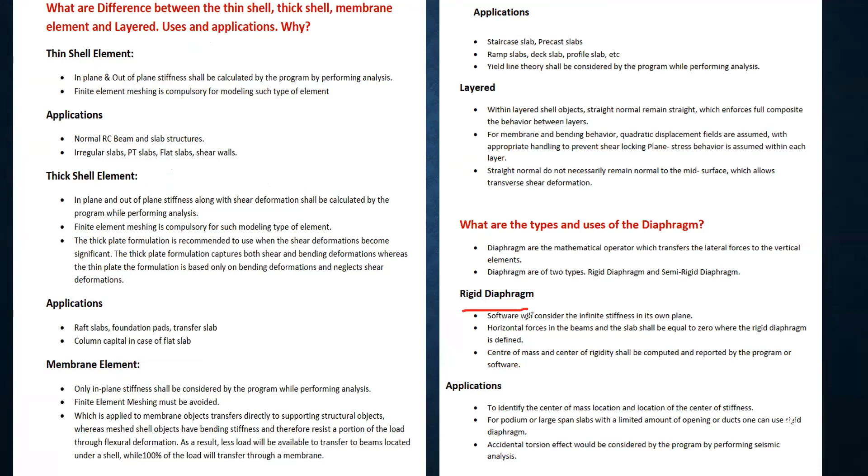If you don't assign diaphragms to your building, it will not transfer the lateral load to the building, and the earthquake design will not be considered.

So what is meshing? We divide the single element into small elements to give more accurate results, and this is the finite element method used.

Meshing is done, and mass source is also used in earthquake analysis. What we do is define the mass of the structure along with additional dead and live load to take into account the earthquake analysis.

These are from the Indian standard, but the UBC and the International Building Code also have this mass source definition.

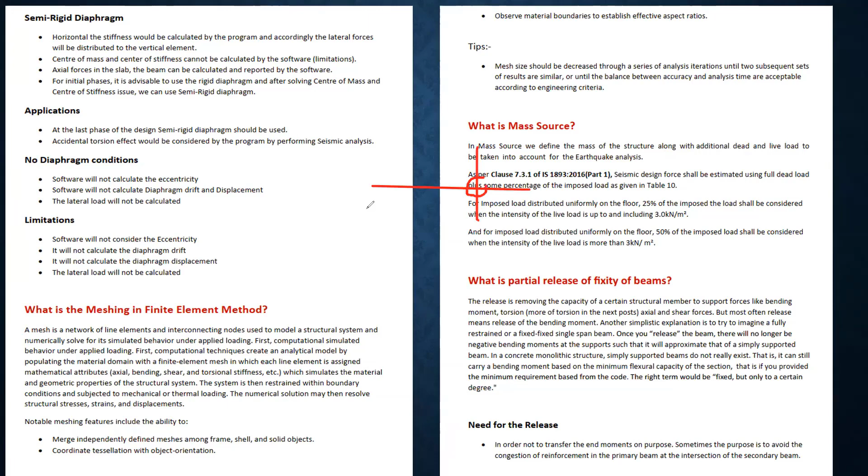And partial fixity, already explained, that when you have two beams, one primary and one secondary, the partial fixity option is used there. Otherwise, the joints are rigid, and you give it the rigid joint connection.

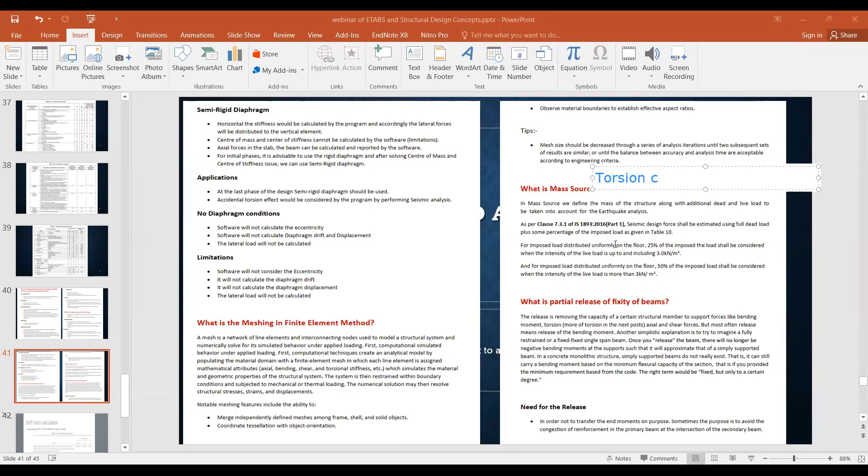Okay, I think it's visible. The torsion constant, this is used basically in beams. We can go from 1% to 10%, right?

So this is trial and error, and it should not be more than that. If it is getting more than that, the torsion is taken by the beam, and the columns are not taking torsion. And what I explained, that beams will be strong enough and column will be weak. So 1 to 10%, normally up to 10% we take for beams.

10% is like 0.1. Yeah. Yes, 0.01. Yeah. Okay. 0.1. Okay, okay.

Sir, shall we design a single component of a structure in ETABS? Yes, you can design, but for what case would you use it? Just to know the bending moment and shearing force. Yes, nothing like that, yes, you can do it.

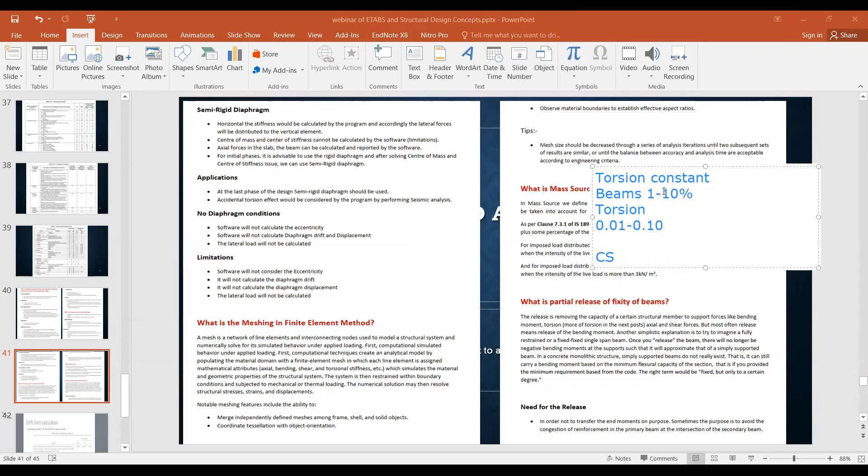Thank you, sir. And now also CSI column software is introduced by ETABS CSI company, so that only designs columns. Yeah, okay, sir.